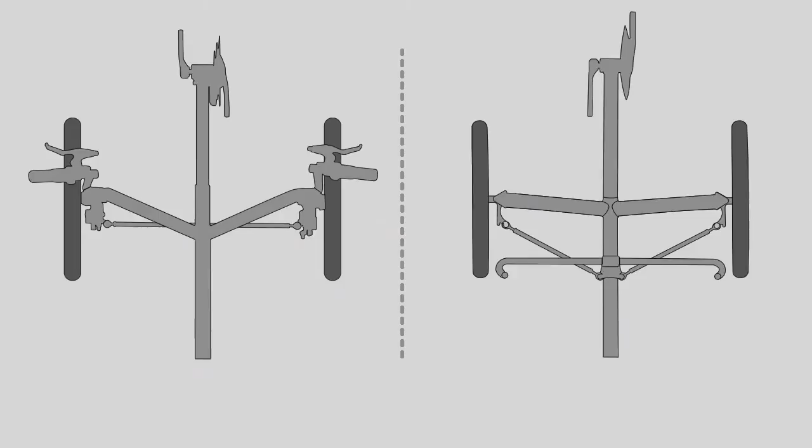In this module, we will discuss the installation and adjustment of the steering systems on our trikes. Two styles of steering are used on TerraTrikes, direct and linkage steer. Most of the trikes in the TerraTrike line now use a direct steering system. Among these trikes, some use our direct steer dual bushing system, while others use our hybrid steering system.

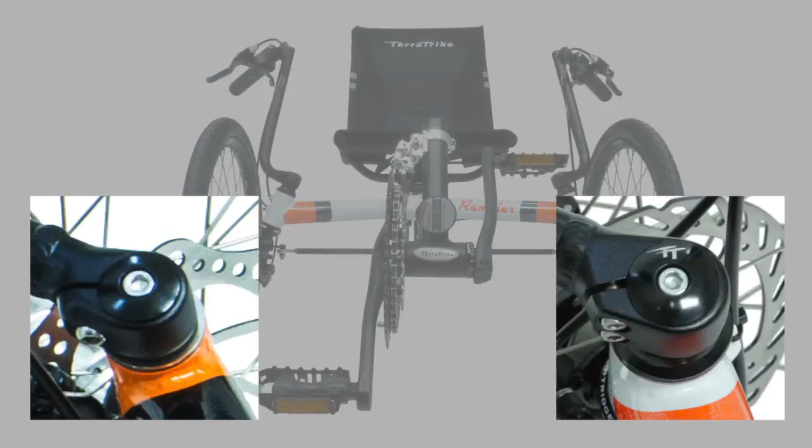However, the Tandem Pro, Tour 2, and many of our legacy models use a linkage steering system. The details of the linkage steering system are covered in the Tandem Pro and Tour 2 modules. This module will focus on the direct steer trike platforms.

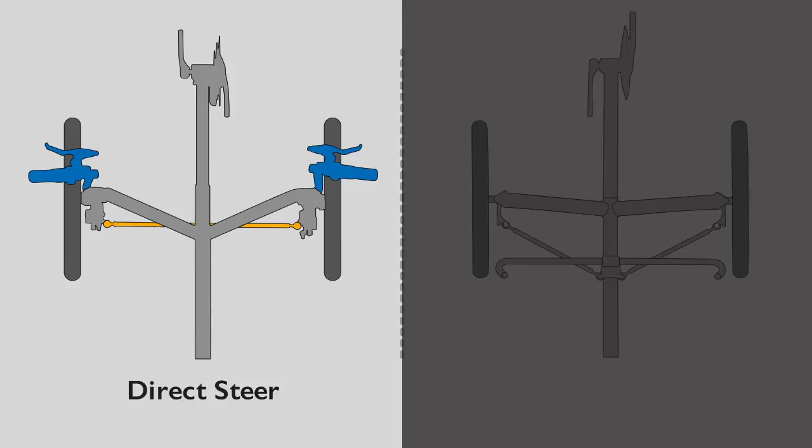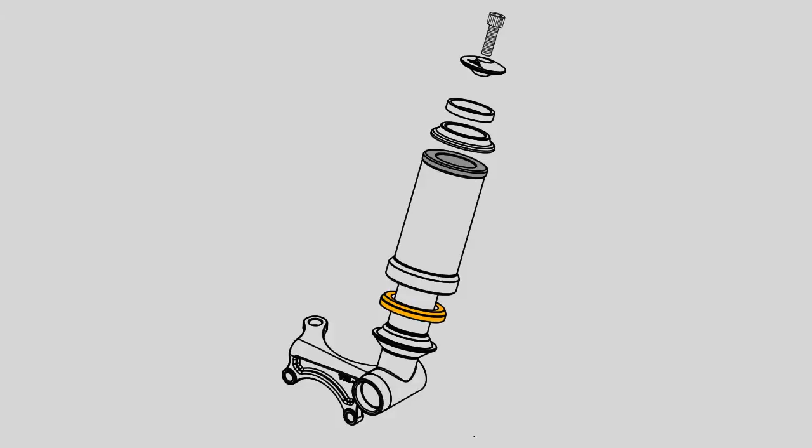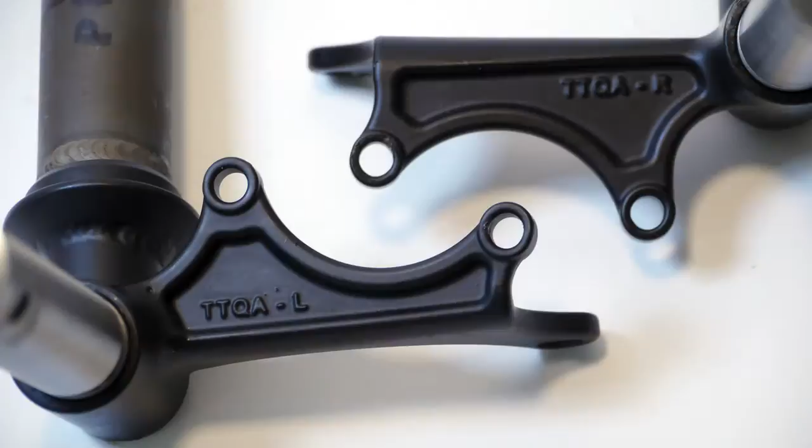First, we will discuss the installation procedure for the hub mounts and handlebars using our hybrid steering system. This steering system uses a sealed bearing on the lower part of the assembly and a nylon bushing on the top. The hybrid steering parts are pre-stacked for the left and right sides out of the box. Identify the left and right sides using the labels on the hub mounts.

Remove the top cap, handlebar, spacer, and headset cap. Grease the steerer tube. Check that the lower bearing is in its place and slide the hub mount into the head tube. Stack the headset cap followed by a spacer. Wipe the grease from the exposed portion of the hub mount.

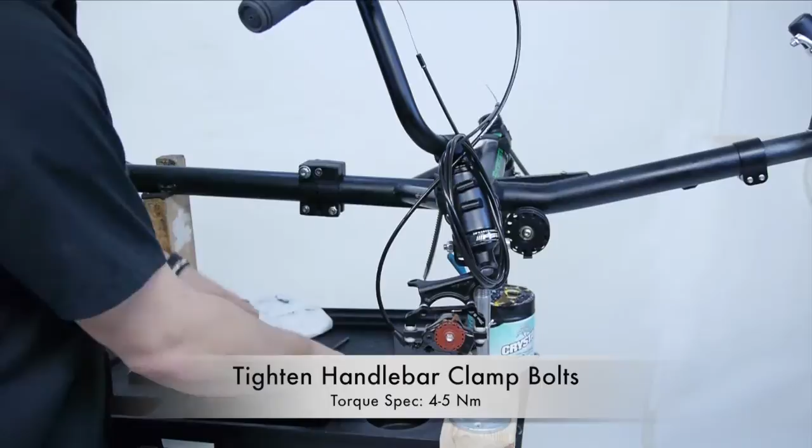Install the handlebars followed by the top cap and adjust to the desired level of stiffness with a 5mm Allen key. Be sure to remove any play in the system. Tighten the handlebar clamp bolts with a 4mm Allen key. Repeat on the other side.

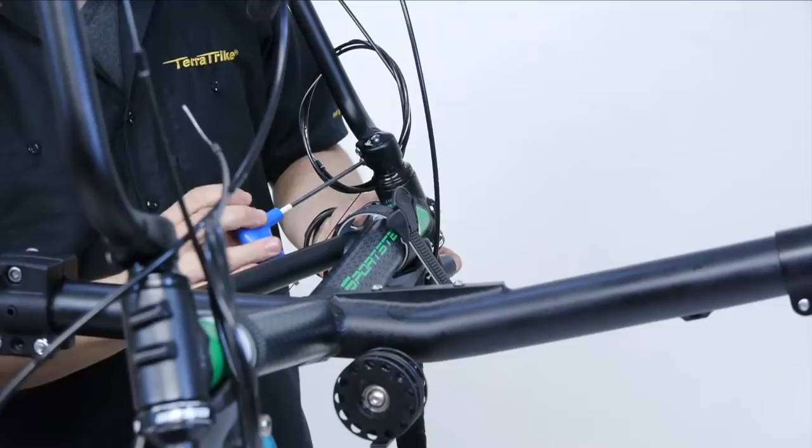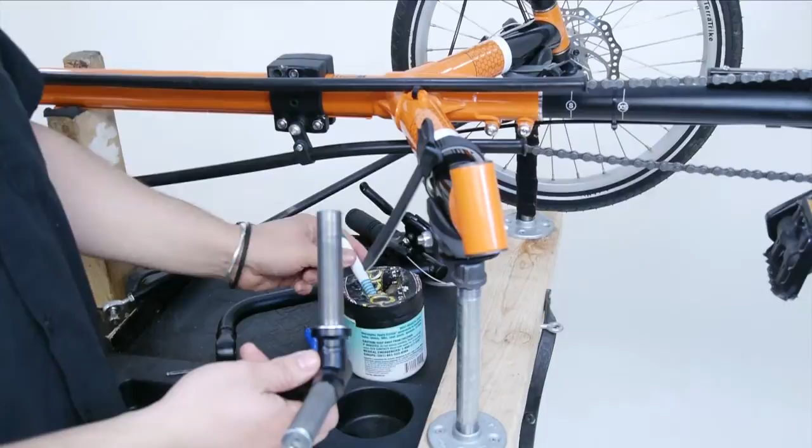Now we will discuss the installation procedure for the hub mounts and handlebars using our direct steer dual bushing system. The Rover hub mount and handlebars come pre-installed, but any other platform using the system will use the following procedure. Identify the left and right sides using the labels on the hub mounts. Begin by installing one 20mm washer on the steerer and grease the steerer tube.

Slide the hub mounts through the bushings in the frame. Once the hub mount is through the top bushings, install a second 20mm washer. Wipe the grease from the exposed portion of the hub mount. Install the handlebar, followed by a top cap, and adjust it to the desired level of steering stiffness using a 5mm Allen key. Tighten the handlebar clamp to 6 to 8 Nm with a 5mm Allen key.

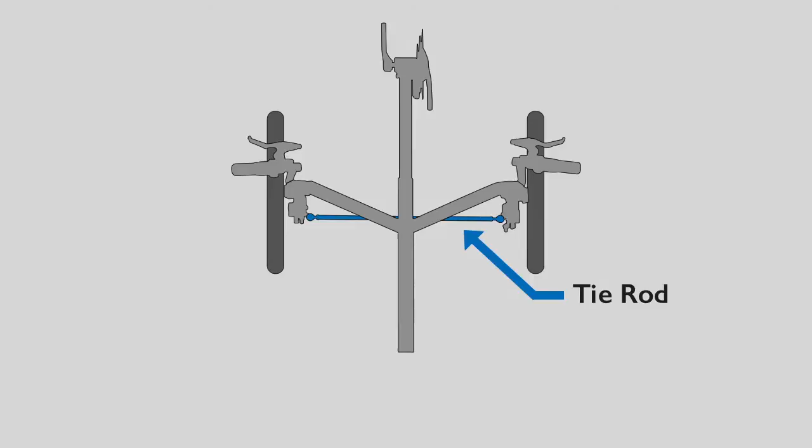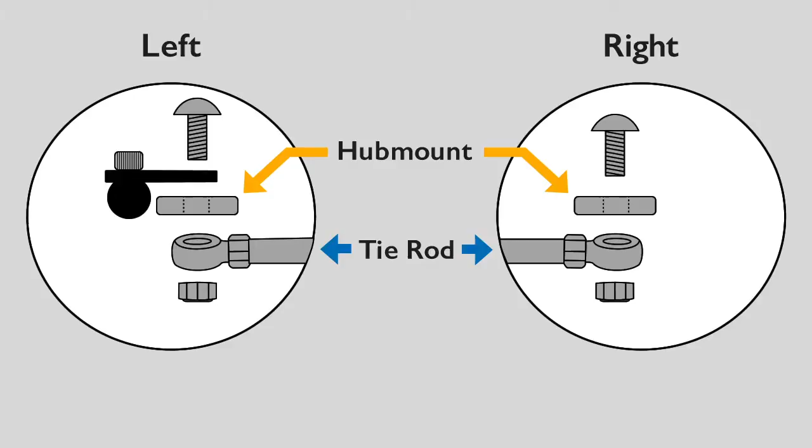The two front wheels are connected by a tie rod that allows them to move together. It is important that this part be properly installed to ensure predictable steering and to avoid drivetrain interference. Remove the nylock nut and grease the threads of the tie rod fixing bolts. Install the tie rod on the hub mounts. Typically, the tie rod goes below the tabs on the hub mounts, but refer to the video for each platform for any variations in tie rod placement.

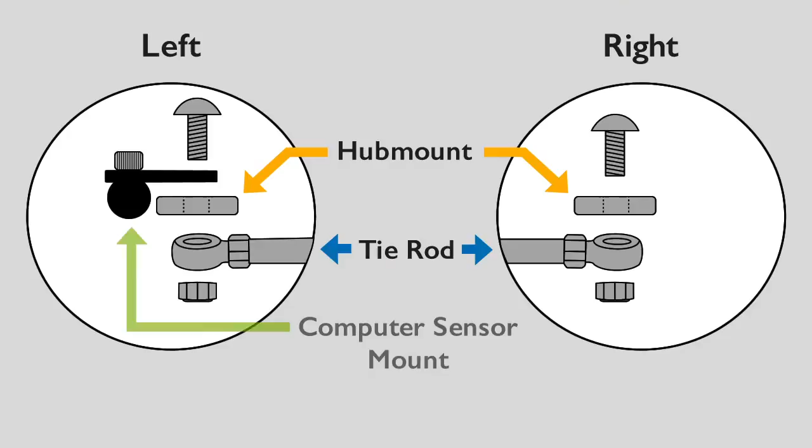Install the computer mount. Typically, we install it on the left side. Make sure it is not between the tie rod end and the hub mount. Tighten the nylock nuts completely using a 5mm Allen key and a 13mm wrench.

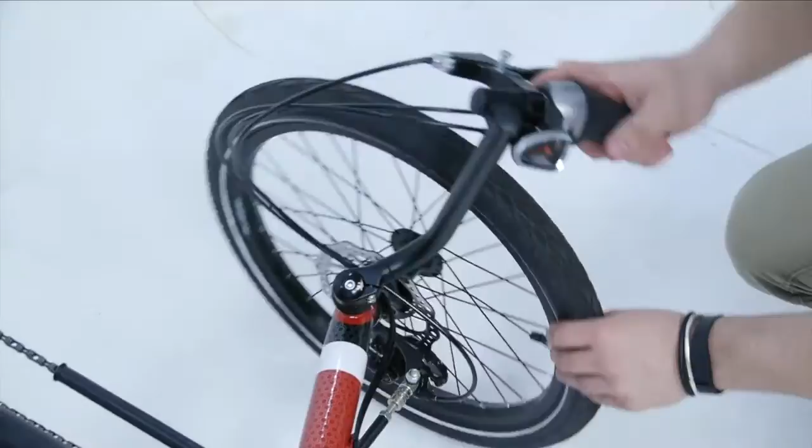Handlebar position and steering feel should be adjusted so that they are even on both sides. When assembly is complete, place the trike on the ground to check steering stiffness and handlebar position. Loosen the clamp bolts and adjust the top cap to change the steering feel.

A tighter top cap will make steering feel stiffer, while a looser top cap will make the steering smooth and easy. With the steering feel adjusted, check that the handlebars are even and tighten the clamp bolts. Check that no play exists in the steering stack by grabbing the brake and rocking the trike forward and back while feeling for movement.